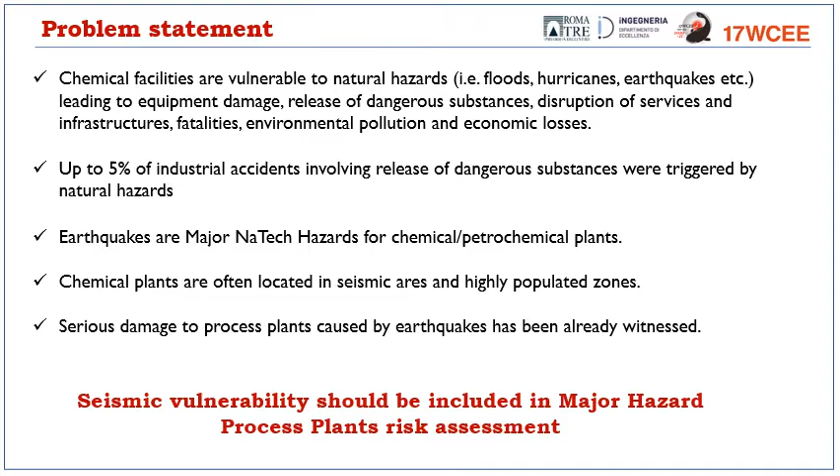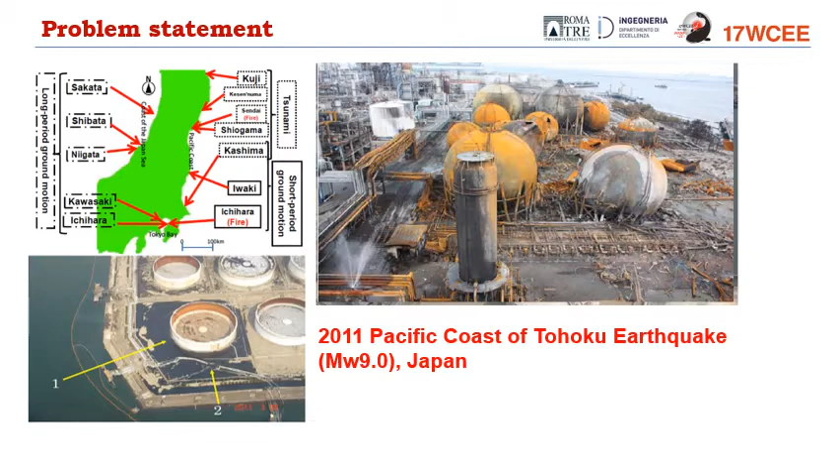Beyond the clear need to tackle the problem of setting up methodologies for NaTech risk assessment, some additional problems are to be faced. There is a general lack of specific rules and standards suggesting clear methodologies. Moreover, there are general inconsistencies of procedures for seismic hazard assessment in presence of hazmat industrial installations. Finally, the high multidisciplinary character of quantitative risk assessment, which includes structural engineers, geologists, and chemical industrial engineers, renders the matter complicated.

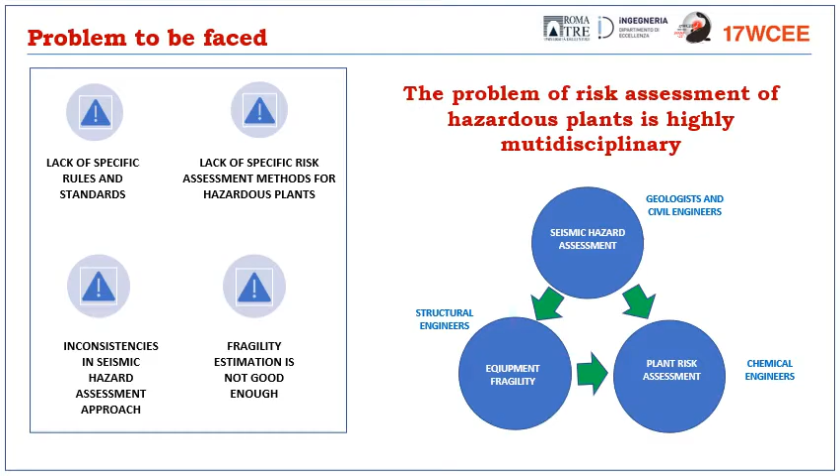This multidisciplinary character generates an additional aspect that, together with my colleagues, we called the communication problem. Basically, the different backgrounds of experts and different scales of the problem induce additional difficulty of communication among technicians from micro to meso to macro scales. To simplify this aspect, there are at least two levels: component level, where methods of structural engineers are required, and system level, where methods from experts of process safety analysis are required.

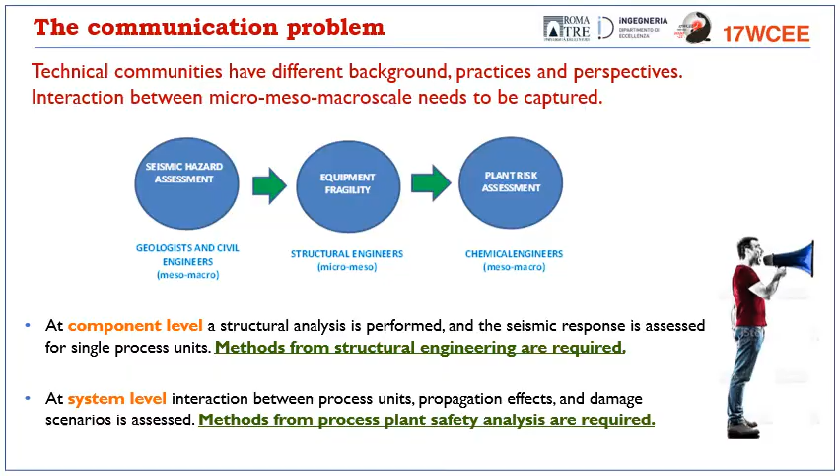The general lack of specific rules and standards on this matter can be noticed. For example, in Europe we have a dedicated directive, the so-called Seveso III, that explicitly considers NaTech events but without providing specific methodologies for risk assessment. In the USA, the guidelines of the American Society of Civil Engineers provide design rules for equipment rather than risk assessment criteria. In general, most international standards often used by the oil and gas industry do not adequately cover risk assessment and do not suggest a recognized approach. For example, Eurocode 8 Part 4, entirely dedicated to critical equipment like tanks and pipelines, does not adequately cover the risk assessment procedure.

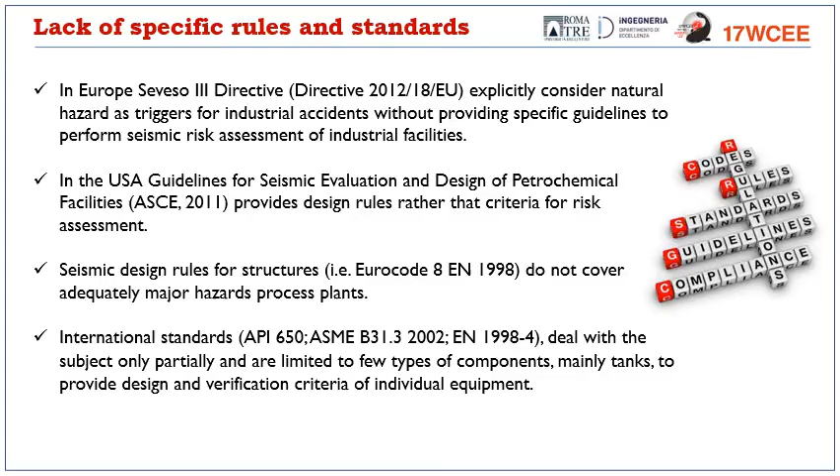All these difficulties generate a prudent attitude among designers and owners of hazardous plants. For example, to comply with the Seveso 3 directive, design PGA is fictitiously increased by applying an importance factor, leading to extremely safe and conservative design. Moreover, because of different importance factors used in European countries, this leads to a non-uniform hazard design.

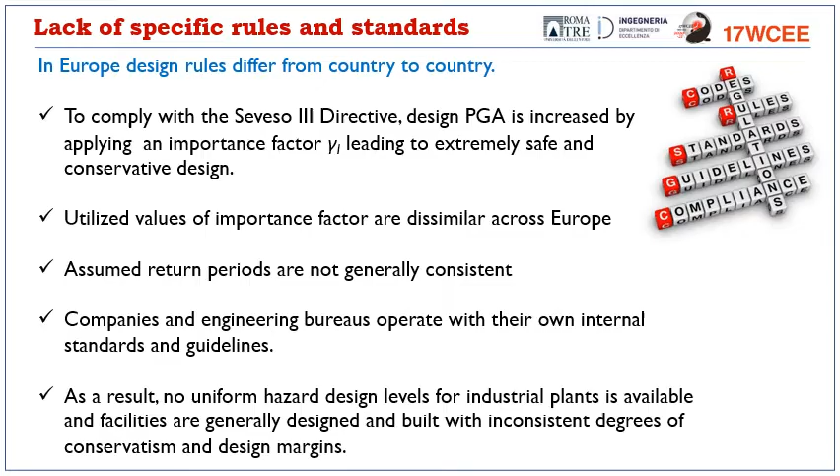To complete the overview, I need to highlight the inadequacy of existing quantitative risk assessment methodologies based on technological hazards only. Moreover, codes and standards for civil and nuclear structures cannot be directly applied to non-nuclear plants, and thus an effective methodology to perform quantitative seismic risk assessment of hazardous facilities is needed, which should include all the above relevant aspects.

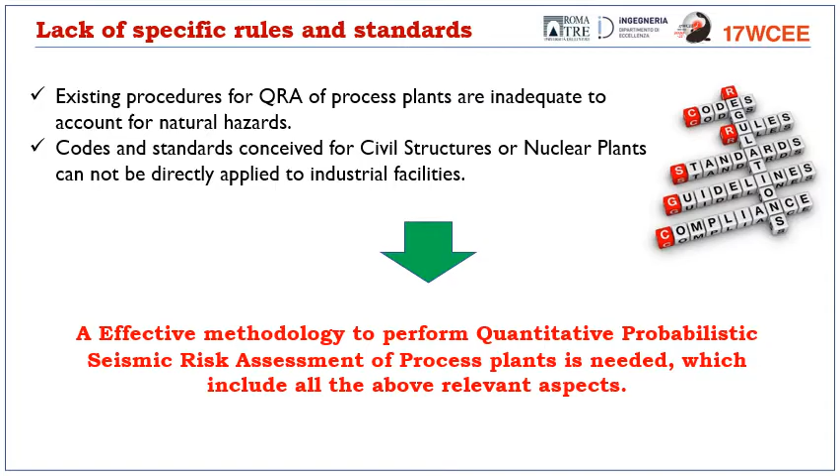To better understand the main issues in the risk analysis of hazardous industrial plants, like petrochemical plants, let's consider a nuclear power plant, which is different. To better understand this difference, let's see this. As well known, in the case of a nuclear power plant, the risk is mainly governed by main events, the core melt, and it is enough to use a fault tree to identify the main critical components that contribute to the generation of the accident and mitigate the risk in this way.

But in the case of Na-Tech events, the situation is really different. We have a multiplicity of accidents generated by earthquakes. For example, the red dots here represent equipment that is damaged during the earthquake. But these can in turn generate multiple chains of accidents, like the red arrows that can hit, in terms of physical effects, the yellow equipment, the secondary damage units, and so on, in a domino effect fashion or escalation effects. So in this respect, facing up the problem using a multiple level approach appears rather suitable, but really difficult.

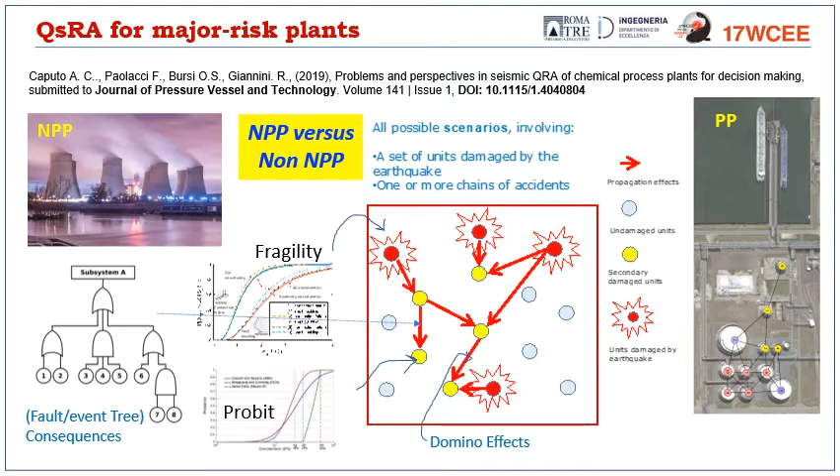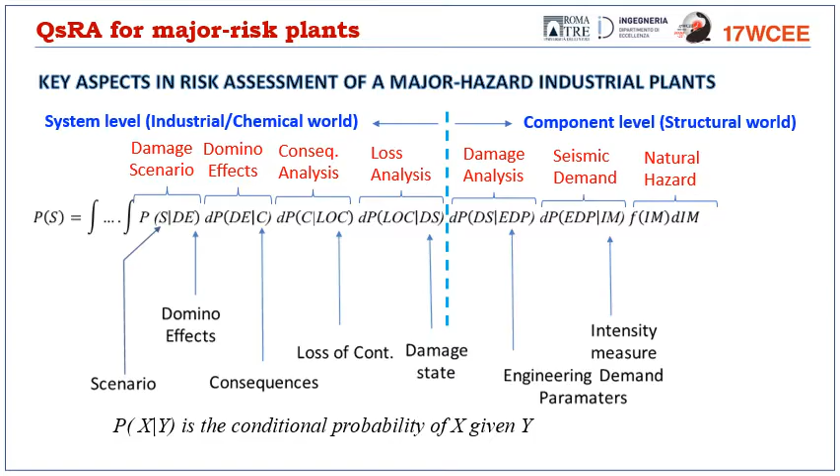Let's start analyzing the several aspects that characterize quantitative seismic risk analysis, highlighting the most critical ones. So let's start with the seismic hazard characterization.

The adoption of a performance-based seismic analysis approach entails the definition of limit states. In the civil field, serviceability and ultimate limit states are typically adopted. But how to translate these in the industrial field?

The nuclear field can help us, where two limit states have been adopted: design basis earthquake and safe shutdown earthquake. The first one represents the earthquake for which the plant is still operative and without damage. Safe shutdown earthquake is related instead to a certain level of damage, but without consequences to the safe shutdown conditions.

The question is how to calculate the probability of occurrence of an earthquake capable of generating these limit states. In the literature, a return period of 475 years is generally accepted for DBE and soil class A. More involved is the case of SSE, which sometimes could entail very high return periods that are not currently included in the codes. Thus clearly emerges the need to set up a QSRA methodology using which the return period can be finally evaluated.

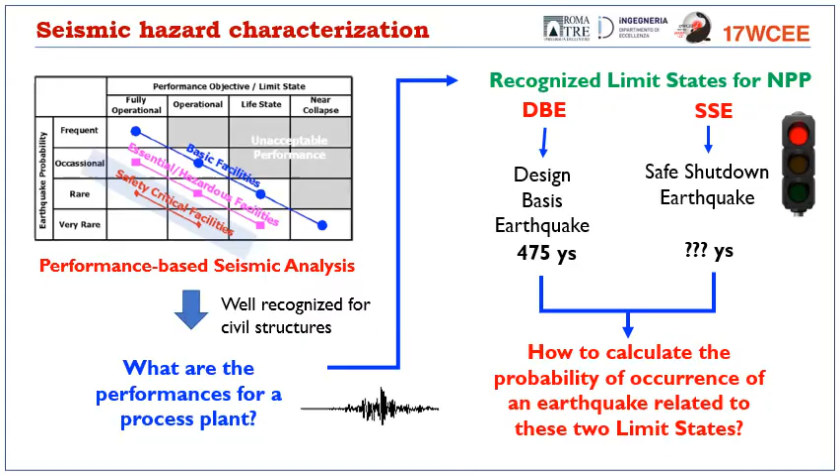Other relevant aspects characterizing the seismic hazard are the following. First of all, the question is what ground motion prediction equation should be used — for example, only local, as suggested by the nuclear power plant field, or ones derived from a wide regional area. This is really an open issue.

The local effects of the soil could also have a crucial role in the risk assessment of industrial facilities, because they are often very large, entailing different soil classes in the same plant. In addition, high vibration periods, which are often present in industrial equipment, as for example for the convective motion in broad storage tanks, can have very large vibration periods, up to 10-12 seconds. So the definition of response spectrum in this range of period could represent a serious problem, as you know.

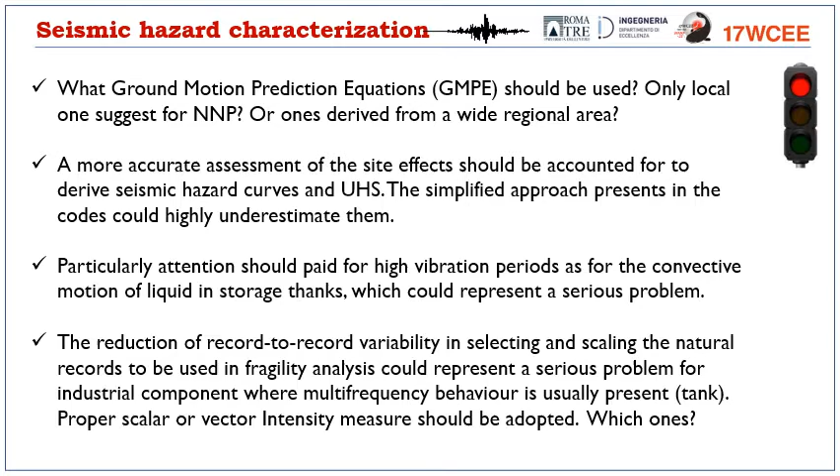And finally, the record-to-record variability in case of multi-frequency behavior could really represent a problem. The difficulty is to recognize a sufficiently practical scalar or vector-valued intensity measure to scale the records. But the experience currently present in the literature in this field is limited.

However, concerning industrial equipment, the definition of a proper model in case of strong nonlinearities and fluid-structure interaction effects, as for example in storage tanks, could have a certain importance. High fidelity models could entail a high computational effort. On the other hand, simplified models could entail big errors.

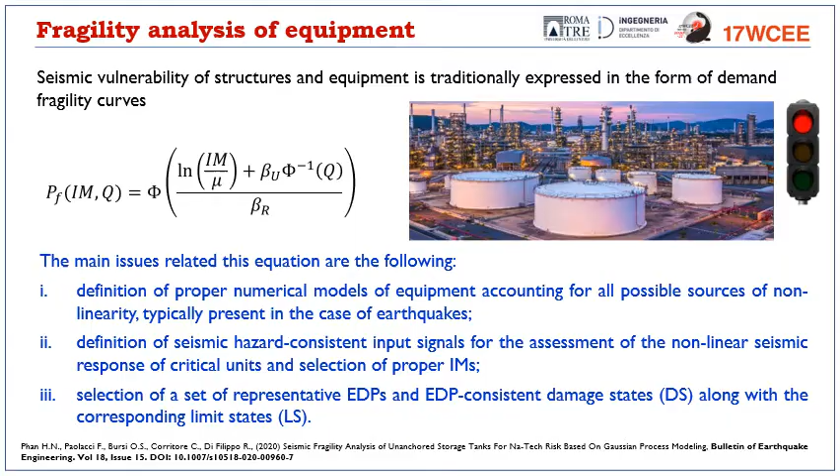In addition, random effects in the characteristics of structures could have a crucial role, as demonstrated in the literature. Thus, a study of possible surrogate models is strongly suggested. But also the selection of a proper intensity measure, well correlated with response, is an open issue, along with the recognition of proper engineering demand parameters and damage, and engineering demand parameter consistent damage states and limit states.

Moreover, how much is the error related to these standard fragility curves? Experience has evidenced that it could be very high. Finally, degradation phenomena are often absent in the definition of fragility curves, even though for industrial equipment the aggressive environment could render this aspect crucial.

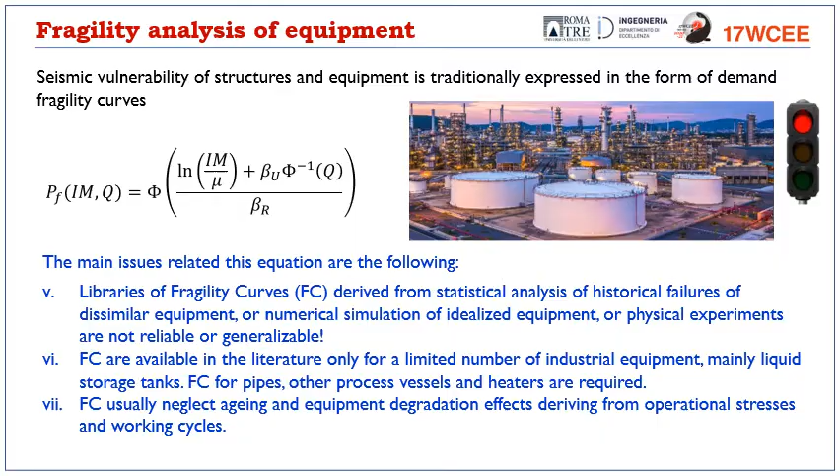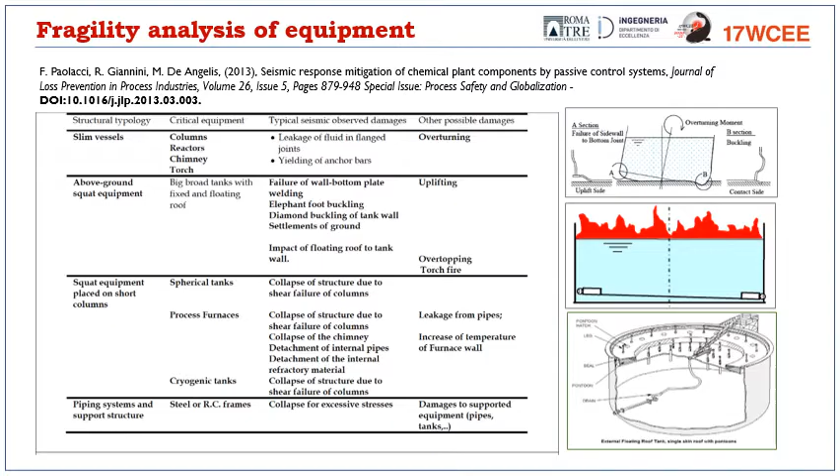So the recognition of equipment classes based on equipment typology and possible damage could help the selection of proper engineering demand parameters and damage states. Here is an example extrapolated from the paper indicated in the slides, where the analysis of databases present in the literature has been used for the purpose.

This demonstrated that local effects and dynamic interaction between secondary and primary elements could be crucial, and the evaluation of leakage for critical fittings like bolted flange joints could be of paramount importance.

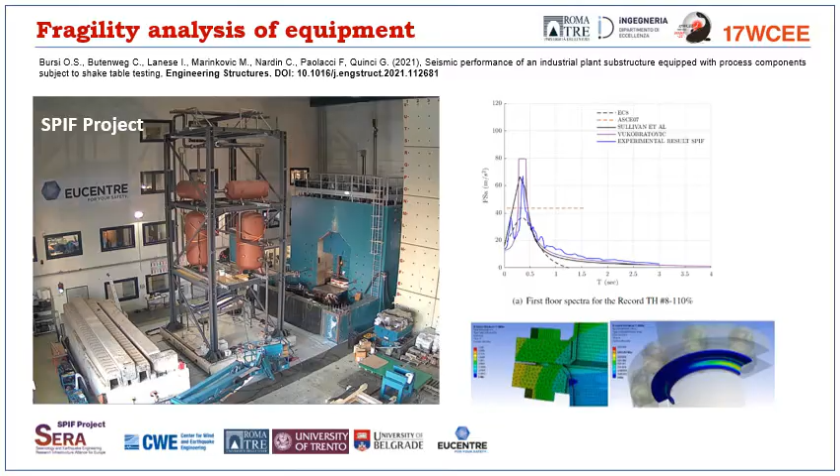Seismic damage can induce loss of content, generating in turn a physical effect — explosion, fire, and so on — on the surrounding equipment, activating with the right conditions other accidents, generating the so-called domino effects. In this respect, three are the main issues.

What kind of relation between damage states and loss of containment could be identified? For example, we could focus on a deterministic or probabilistic approach.

What are the critical equipment for which the loss of containment could induce escalation phenomena? And finally, the target equipment able to propagate the damage should also be identified.

Concerning the first aspect, an experimental approach is typically suggested to calibrate analytical models. However, only a few experimentations are currently available in the literature.

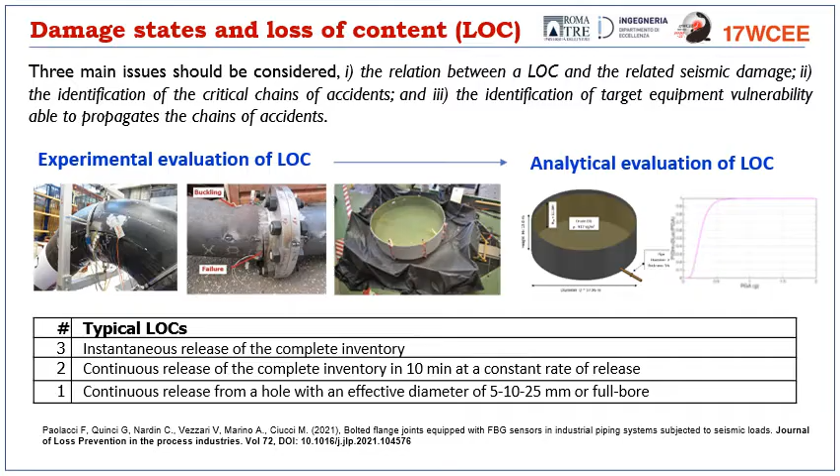To answer the first question, a possible approach is to use loss of containment matrices, like the one in the figure, that relate the two aspects in a deterministic manner. Standard loss of containment events can be used, trying to identify for each such event the damage able to generate it. This approach has been suggested in the paper indicated above.

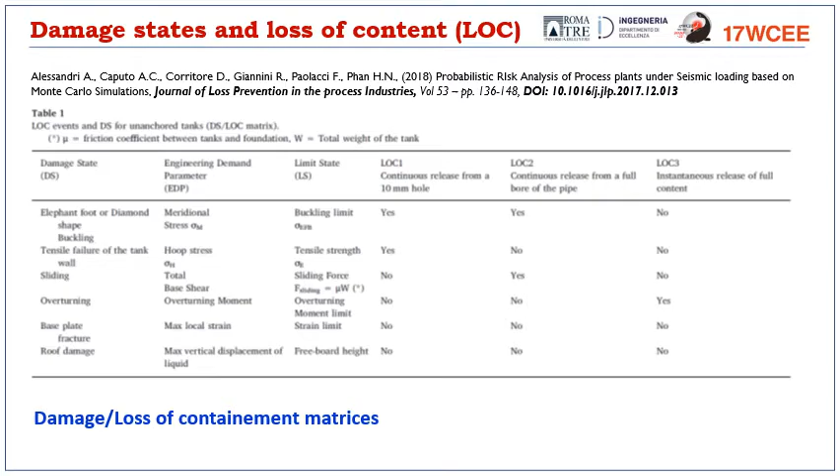For each element, the effect of damage propagation can be determined using specific event trees, for each source and target unit, along with models for determination of physical effects such as thermal radiation and overpressure, which are more related to the chemical and industrial worlds, to derive the related consequences.

In all the slides, I've suggested some readings that can help you follow and understand better details on this page.

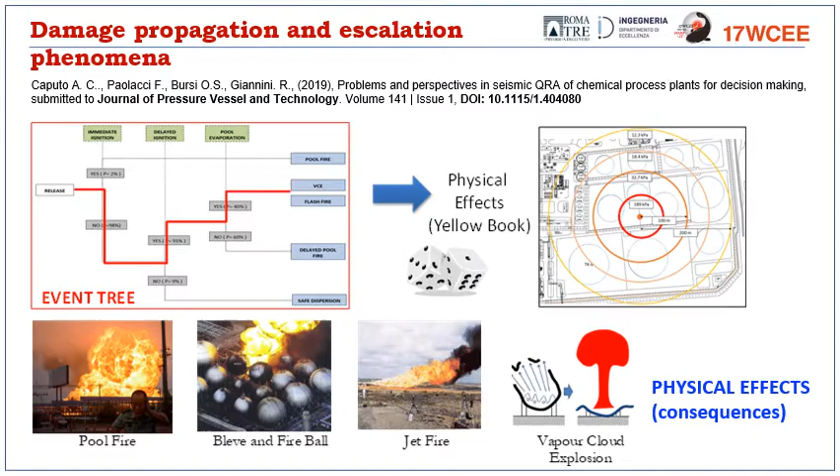In domino chain propagation modeling, two different approaches can be used: probit functions, used to derive the probability of damage for a given intensity of the physical effect, and conventional damage zones, where a conventional threshold value of the physical effect intensity is reached.

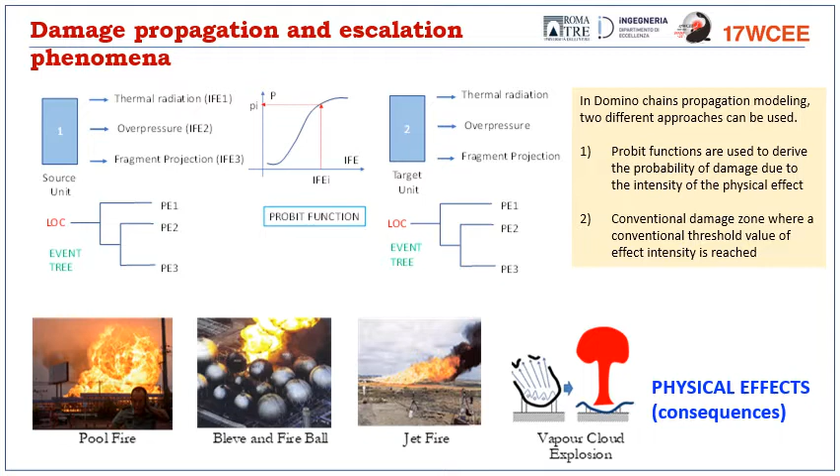In the pictures, there is a simplified scheme of the first one.

However, a QSRA methodology including, in a detailed and realistic manner, all the steps listed before is not yet available, despite more than a decade of research effort.

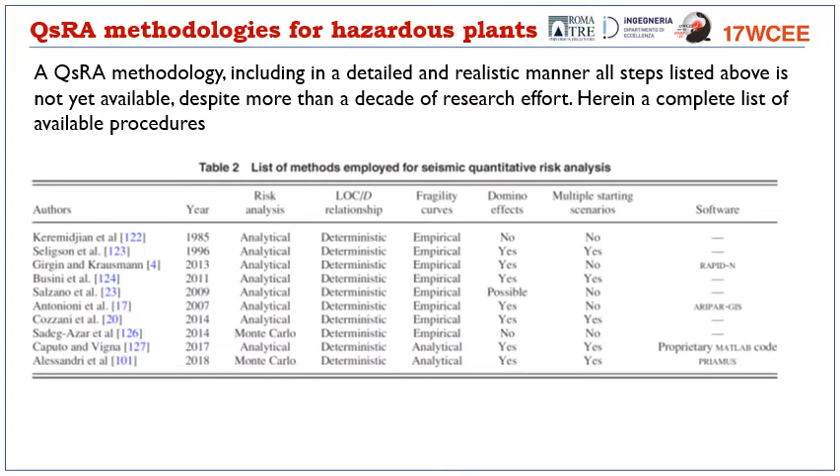A recent proposal comes from my research group that tried to solve most of the issues listed before. A practical software developed in a MATLAB environment has been proposed, based on Monte Carlo simulations. A multi-level approach is used, where levels greater than zero are dedicated to the domino effects, based on probit functions and classical methodologies to derive physical effects.

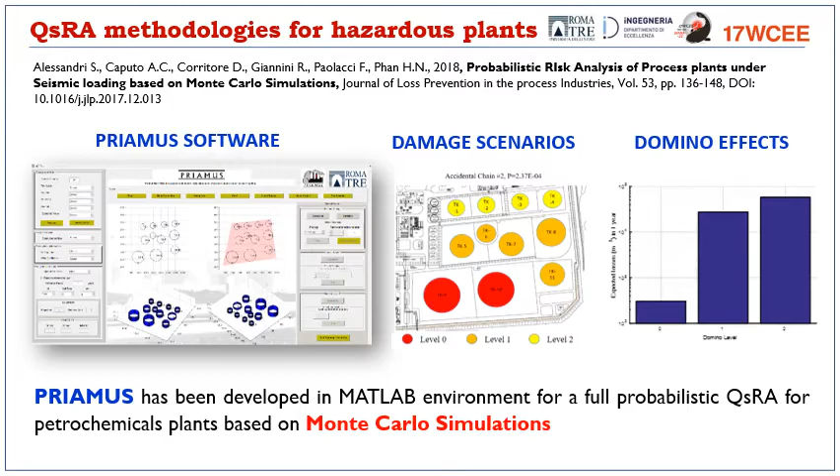The risk can be expressed both in terms of economic losses and individual and societal risk. These two last metrics are typically adopted in classical QRA.

Some of the strengths and limitations of quantitative seismic risk assessment methodology, as used in some technological sectors such as chemical process plants, have been discussed. The main conclusions are the following.

Process plants require different QSRA methods with respect to nuclear plants or civil structures, as well as traditional QRA methods for chemical plants. So the two worlds must talk.

Multiple starting scenarios and simultaneous interacting chains of accidents should be modeled in a dynamic manner. A novel automatic method to systematically generate starting scenarios and keep track of accident chains is needed. In this respect, Monte Carlo simulations appear credible.

Reliable information about equipment fragility and possible damage states are required, and credible correlation between structural damage and loss of containment is needed.

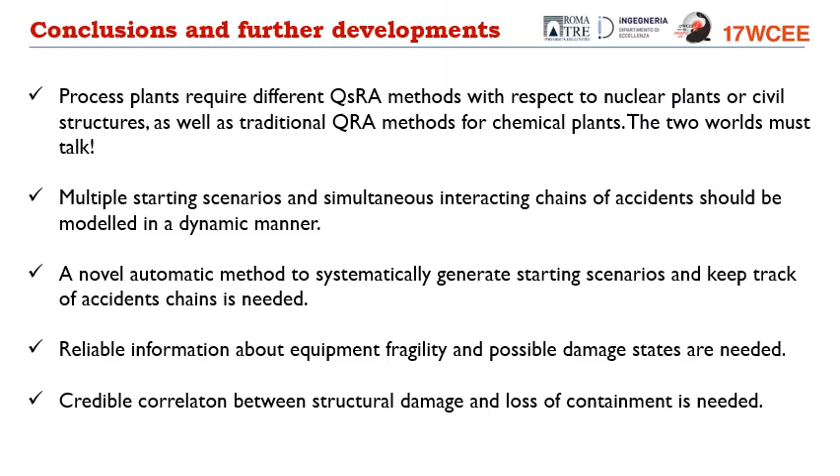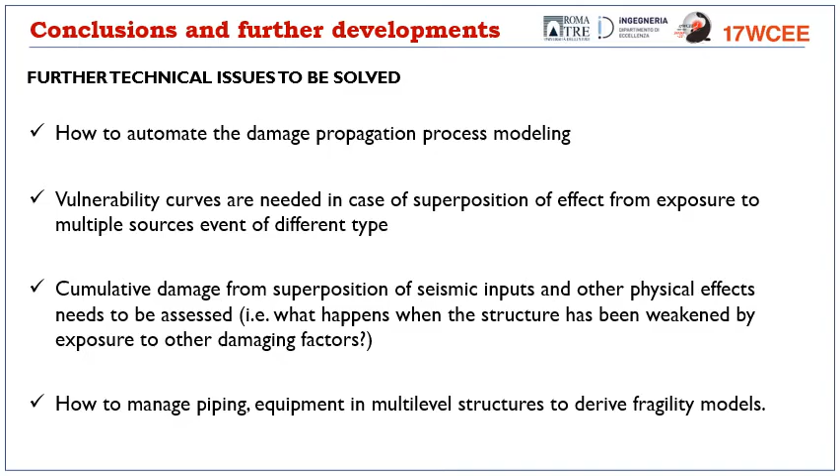And finally, how to manage piping, equipment, and multi-level structures with the right fragility models. These are some of the open issues for future research.

Around the world, there are many working groups dealing with several aspects that we've spoken about today. One of these is Working Group 13 of the European Association of Earthquake Engineering, working on seismic assessment, design, and resilience of industrial facilities.

This is the long list of partners, many universities and institutions with different expertise in the fields of seismology, earthquake engineering, resilience, and Natech risk. It is coordinated by me and Professor Christoph Butenweg of Aachen University, and the idea is to cover all the aspects we discussed today.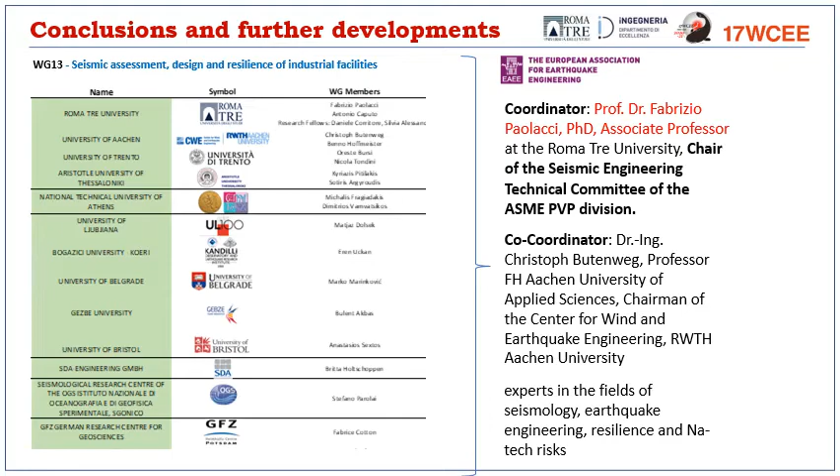Another very active working group is the Seismic Engineering Technical Committee of ASME, Pressure Vessels and Piping Division, whose chair is Professor Paolacci, who has held the chair during the last four years. Every year we organize, within the ASME PVP conference, a series of special sessions dedicated to the topic of my speech, trying to stimulate comparison to solve problems.

So whoever is interested in joining us, please keep in touch with Professor Paolacci. With this last slide, I end my presentation, and thank you very much for your attention.